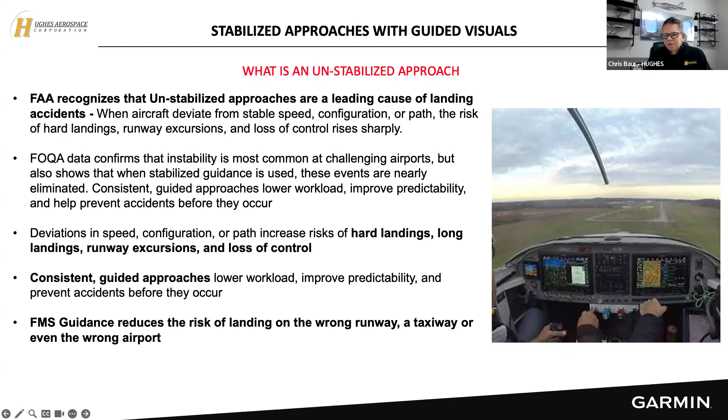So one of the things I worked on, if you want to go to the next slide, was to come up with a way we could fix this in a deliberative fashion that pilots could accept and work with. The FAA recognizes that these unstabilized approaches cause accidents. FOQA data confirms whether we're doing a good job or not. And what we found is that certain runways tend to be tough for everybody. Sometimes you'll have a pilot that should go around and doesn't, or you have a runway that's just really hard, and it's not so much about going around—it's like, how do I get to it?

So go to the next slide. This is actually taken in my aircraft, and this is a guided visual approach. This goes into Grand Prairie, and oftentimes I find myself going into Grand Prairie, filing and flying IFR from Houston up there. Then they'll give me a visual approach landing to the south before I enter Fort Worth's traffic pattern.

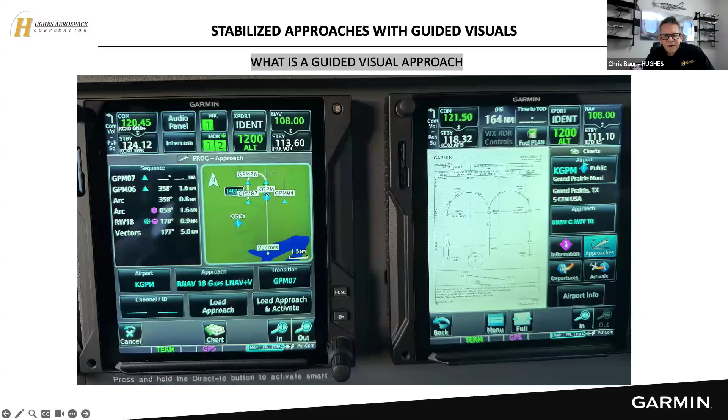And they'll want you to call the runway in sight so they can get you there, but it's not easy to pick out. So this all stemmed from about 20 plus years ago, when I worked on a project to create the first RNAV visual flight procedures, or RVFPs.

We had a real problem with runway 29 at Newark. Pilots either overshot the turn, undershot the turn, were too high, were too fast. It was tricky because it was trajectory based, and it wasn't something where there was an ILS or something else that could back them up.

So I went to the FAA and said, what if we coded this and put it into the flight management system, and the pilot could fly the Magenta line and we could give them lateral and vertical guidance? Initially the FAA was like, I don't know, we don't know if we like that idea. And I worked on it and worked on it, with somebody in the RNAV office back when they had one, and the tower chief in Newark.

And we co-authored this notice that's in front of you, this 8900 series that brought the RVFP to life. And the first one was runway 29 at Newark. What I will tell you is the off-the-hook FOQA data evaporated as soon as we started using this. We no longer had unstabilized approaches, wrong surface landings. This did an amazing job.

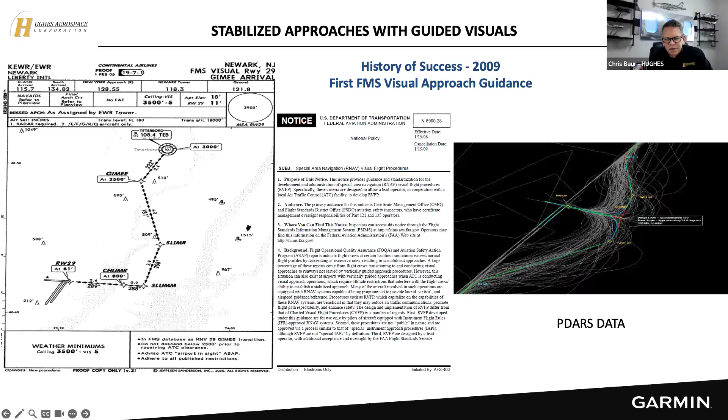So how is it made? People say, how is the sausage made? Well, AOPA did a really nice article about it called How It's Made, where Hughes built instrument flight procedures into Merrill Field in Anchorage. It talks about how that's done and what the process looks like.

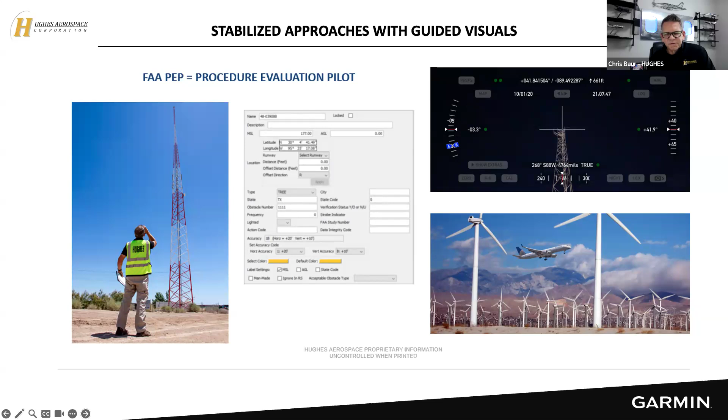So in my example, you're looking at this red cone, and we want to put a waypoint there. This is why you'll find instrument flight procedures that are kind of wonky, where you're really high, and then all of a sudden you have to dive to get to the ground. Because there's a waypoint, but because of an inaccurate obstacle, it blocks out a ton of airspace. That's an example of what that would look like and why we go out and resurvey them.

Now with guided visuals, it's not the same because it's a visual procedure flown in VMC conditions. Obviously, if you saw something in front of you, you wouldn't fly into it, you would turn away from it. But this also has a role in guided visuals.

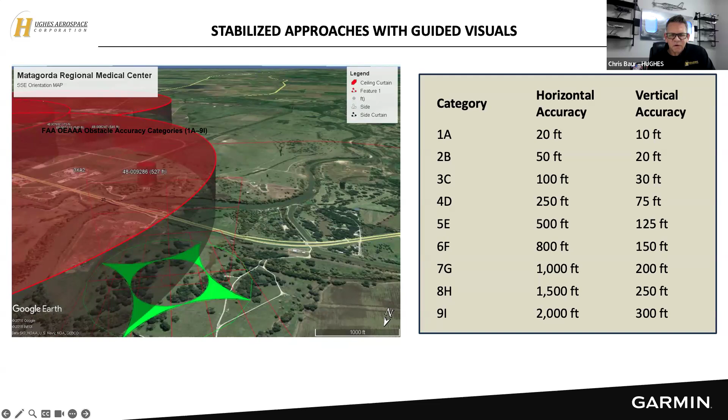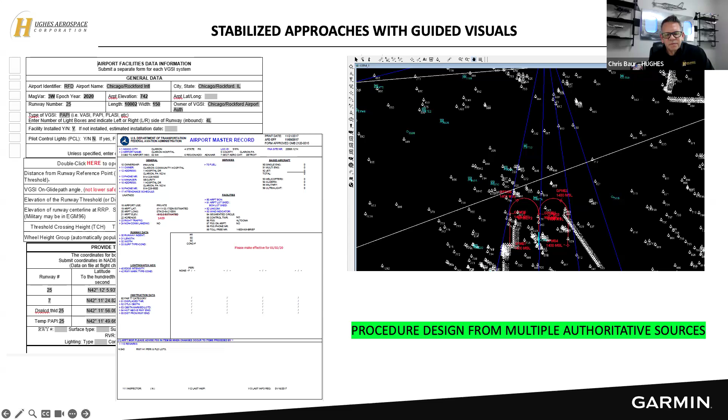So when we design the procedure, we pull the 5010, which is the record for the airport. We look at the runways, we look at all of the data that's available, and then we put this into software and we model it.

In some cases, we'll look at it in a simulator. In some cases, we'll fly it in the aircraft. In terms of guided visual, it's looked at in simulation. Same thing with RVFPs, those don't require a flight inspection.

When we build instrument flight procedures, we do an actual flight inspection in the aircraft with a Garmin flight inspection database. And then, like in the case of airport lighting, we have a letter of authority that allows us to certify the runway and the airport for night IFR operations. We can also have another letter of authority that allows us to do calibration and flight inspection on visual nav aids like PAPIs. That's why sometimes you will see on an instrument flight procedure it'll say NA at night, or VGSI not coincident, where they don't match.

So here's some terminology for you. You're probably familiar with PBN, or performance-based navigation. So whether you're flying this visually or you're flying this IFR or whatever you're doing in your aircraft that involves a flight management system, a database, all of that is performance-based navigation. And that's a fundamental shift from legacy navigation, where we flew between radio aids. Like when I first started flying in the 70s, a radio navigation aid like an ADF was considered something great.

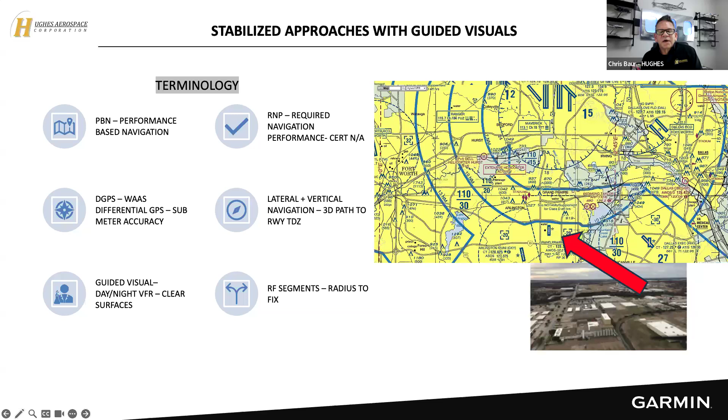Lateral and vertical navigation, a three-dimensional path to the touchdown zone. And these procedures use RF segments, which is one of 23-ish ARINC 424 codes. So ARINC 424 codes that fly you in a straight line between waypoints, that's a track to fix or TF leg. A radius to fix is basically an arc between two waypoints. This map is pointing to Grand Prairie. And there's a shot of what that kind of looks like if you're lined up on the runway. If you go to the next slide.

So I get this a lot. Airport, 1 to 2 o'clock, 7 miles. That's kind of what it looks like. I'm in the left seat. Airport's off my right shoulder somewhere. The guided visual really helps me figure out what my optimum turn point and descent would be. That's going to give me a stabilized trajectory-based approach to the runway. Next slide.

So let's talk a little bit about what the expectation is. So air traffic, these are not instrument approaches. So air traffic is going to clear you for a visual approach. This is a tool to support you in flying that visual approach. They don't have a copy of this. They don't even know if it exists. That's why if you look at the waypoints, they're the first 3 letters of the airport and a number. It's not, oh, I'm going to fly to this waypoint and air traffic will clear me for that. They don't know. They're clearing you for a visual.

You can pull this up and use it to your advantage. It is not a substitute or something to be used in IFR IMC conditions. This is a visual maneuver when cleared for a visual approach.

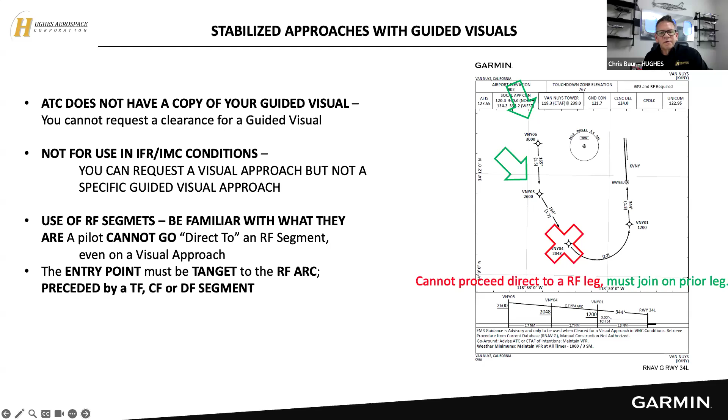Use of RF segments needs to be understood because you can't go directly to an RF leg. So I put a red X. You can see where that RF starts. You have to go to the waypoint or waypoints prior to the RF leg. If you try to go direct to an arc, it's going to fly straight through it. It will not capture it. Next slide, please. So I'm going to turn it over to my partner, Joey, here, and he's got some really great touch points to talk about how this all works in the avionics.

Yeah, thanks, Chris. So just putting it all together here, some of you may know Shannon Day. He had posted on his experience a few months ago flying Garmin Guided Visual into Scottsdale in his M2. I think he's in a CJ3 Plus now, recent delivery there. But he had a terrific experience there and has some details. So we'll just go through that scenario that he experienced.

There is an approach into 21, though it's marked authorization required, and our avionics don't have the technology, INS sensors and things like this required to take advantage of that advanced capability. But we are leveraging some of those same things and tools that Chris just mentioned, RF legs, et cetera, to help us out in some cases with these guided visual approaches to make these possible. So that's just kind of a bit of the background setup with the situation.

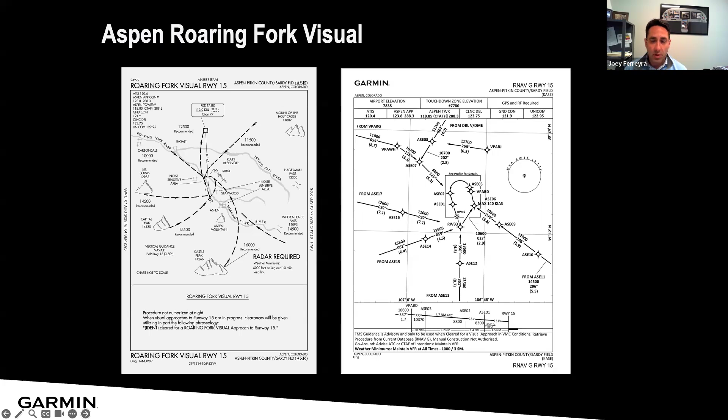You're really just looking outside the aircraft. It helps alleviate that workload for you to be more aware of your surroundings, and just focus on configuring the aircraft and getting it in a nice stabilized condition.

So that's just another example there. So today there's 31 approaches at 25 different airports. These are published on our website. So you can go to garmin.com/guidedvisuals to get this list effectively to see where these are at.

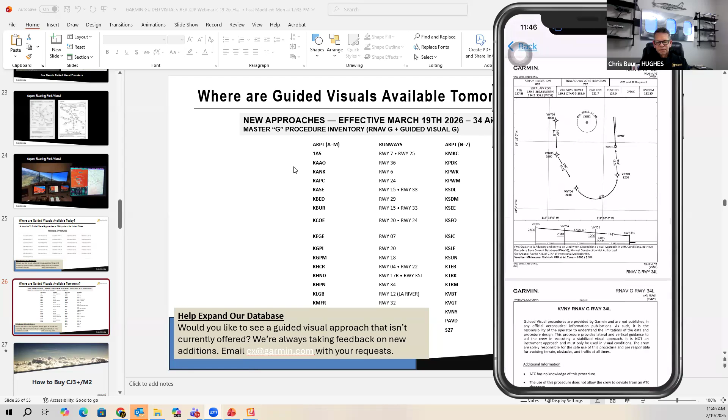But like, here's one going into Van Nuys. It'll bring up both charts, and then you could tap and you can view it on a map. And then if you activate the weather camera feature with this device right here, you'll notice this camera pops up. I can tap on that and I could get a live weather camera image all in one spot. So the app is free. It has a lot of tools in it, different tools that have safety features.

One of them, there's a VFR prediction tool where you could put in 2 waypoints, airports, lat longs. You could even draw your own route if you're going to go out and do a test flight. And it will do a prediction model for you. Like there's Scottsdale, let's say from there you're going to a little airport up in Washington, hit update route. It'll draw a line and then it'll give you a prognosis. You can see most of this is green, just the end of it goes to marginal. Then there's a slider at the bottom and you can change the time, and now it's changing what your likelihood of having VFR is on that.

The other thing is when you go to plan, go to brief, it'll tell you where you might encounter icing conditions, what mileage along your route you encounter, what kind of weather, moon illumination, a summary, and then it'll pull up all the weather cameras along your route of flight if you want to see what's going on. And then it'll also pull up NOTAMs along your route of flight. So there's a bunch of safety tools in here.

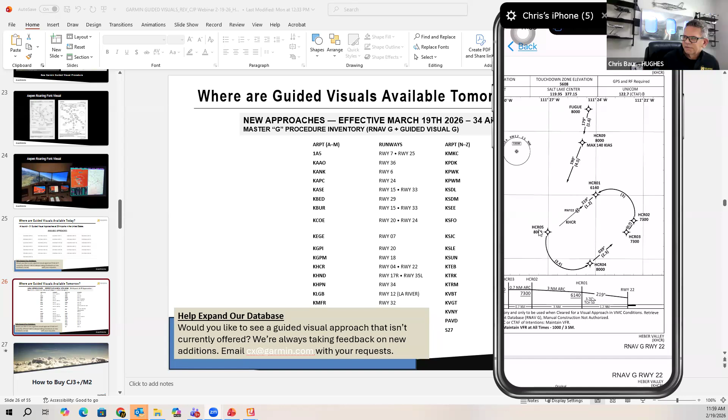They don't have these, but they have FUGUE. If you see a real waypoint, a real 5LNC, that's a waypoint where we tied it in so you and they would know where you were. These that have the airport's identifier, HCR for the three letters of Heber Valley with a number, they do not have those. But FUGUE they would have.

Awesome. Jonathan Bailey, I know that you asked a question. Did you want me to read it out loud or did you want to come off mute? Oh, yeah, I know we're running out of time. It's a bit of a loaded question, or I kind of know the answer, but I thought it's fun to talk about.

We've had a number of seminars, meetings with NetJets over the years, just talking about safety in general, and I think they were one of the leaders in implementing guided visual approaches. They had some scary data about nighttime visuals into Henderson from the east. We've all heard about Truckee, which is close to my home base, coming in from the south on the visual or from the southwest over the lake. And they have shown us.

So, Chris, you may have worked with them in helping to build some of their visual approaches. I think that was done before anyone else was doing it. Talk about it. It was a neat learning for us about what they had done and how their data improved. Well, I can't speak for NetJets, but yes, they are a customer and we have built out a network for them. And things got better? They're happy. All right. Well, they showed us some charts, their FOQA data before and after the visuals were available, for instance Truckee, and it was remarkable.